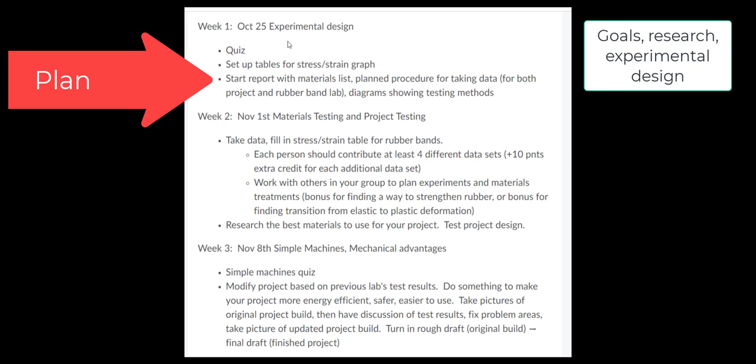Just a quick recap. Hopefully you made it through designing an experiment: how you're going to take data, what inputs you're going to measure, what outputs you're interested in, revisit the goals and working criteria of your project, and think through what pieces of that you are meeting. Once you have that experiment planned out, the next step is to actually take data, measure something, whether it's strength, energy efficiency, or ease of use. You could talk to neighbors or friends, ask them to try it out and give you suggestions.

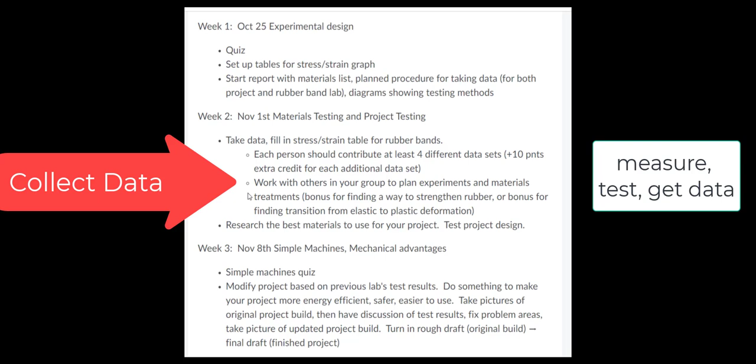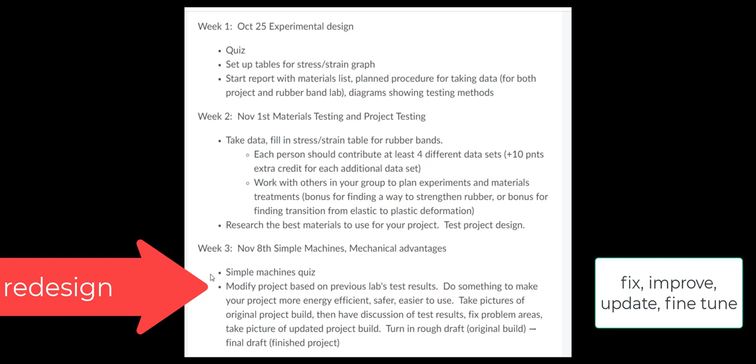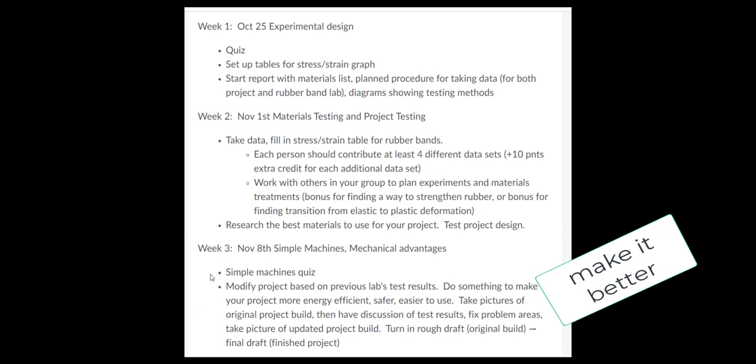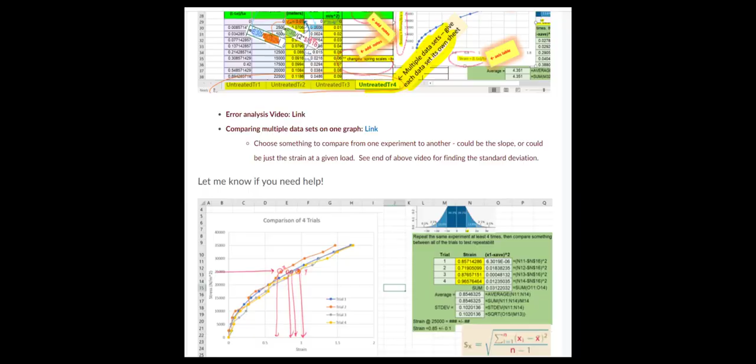After you test it and get that data, the final step is to redesign. Take into consideration the tests and data you collected and make what you built just a little bit better. Nothing out there is perfect. There's no perfect car, no perfect house. Everything can always be redesigned to be just a little bit better, and that is the point of testing. That's how progress is made, fixing and updating things every year to make it a little bit better.

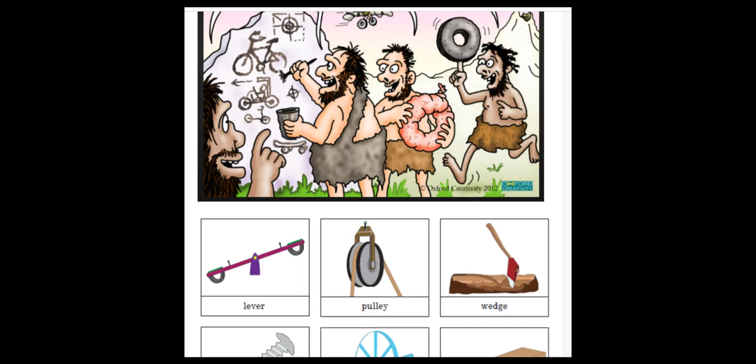As part of this, I wanted to introduce everybody to some simple machine concepts used throughout mechanics classes and mechanical engineering. There are different ways of taking large forces and turning them into small, manageable forces—things like levers, pulleys, wedges, screws, wheel and axle, and inclined planes. So what was very difficult to lift and move around becomes very easy using some of these little tools.

There is a quiz that goes through some of these concepts. I made this quiz bonus because I want everybody to really concentrate on modifying their project this week. So your number one priority: work with your team, update and modify your project, do some research, see how you can make what you built just a little bit better, document that—take a picture of the original build and then a new picture of what you updated. This quiz goes through principles of how to use gears, pulleys, and levers to take large forces and turn them into small forces.

I'm going to go through a few notes, and there are some PowerPoints attached in the content for this, but it is bonus. Some of these concepts—if you have not made it through Physics 1 yet, or seen any mechanics classes, and this is just really frustrating to get through—you do not have to get through it. It's just a bonus, but hopefully it will introduce ideas on some of the magic of mechanical engineering, of being able to move mountains very easily. It's these games you play with forces and force ratios that allows us to do that.

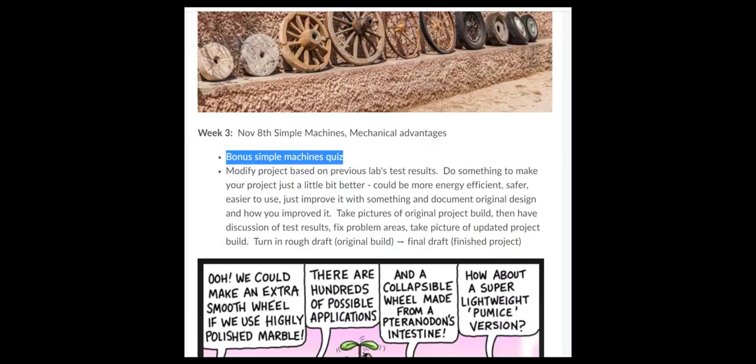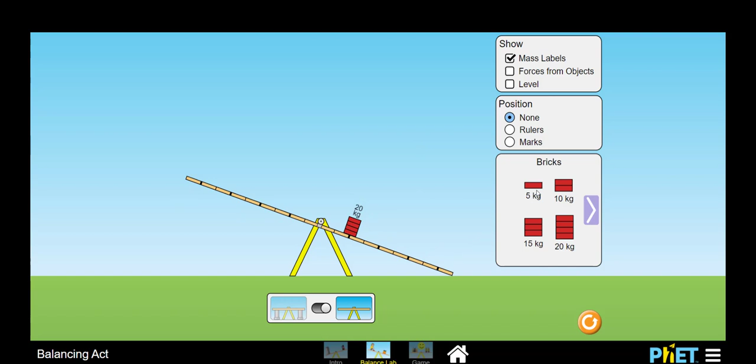I'd like to start the discussion of simple machines with a lever arm. This is a PhET simulation from Colorado University, Boulder, back where I'm at. Let's say you have this huge weight, and maybe you're just not strong enough to lift this thing on your own—maybe this is the maximum of what you can move around. So you want to be able to move this huge weight with a teeny tiny little force. That's where lever arms come into play, and there's a couple of different ways you can set this up.

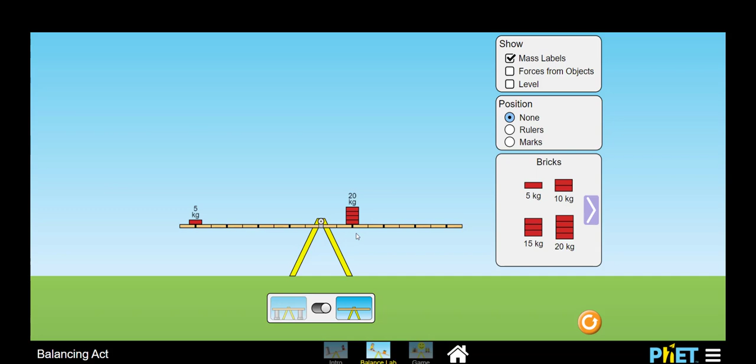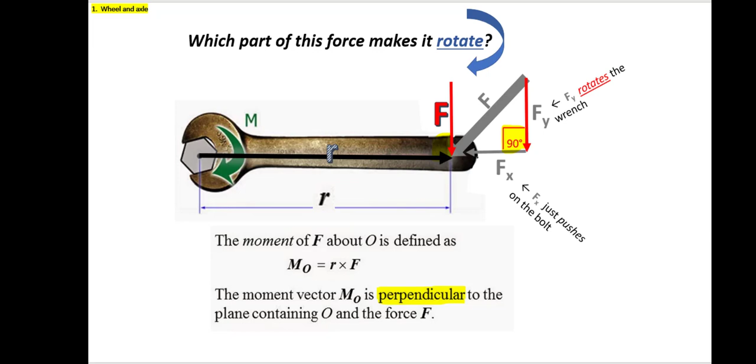The idea is to twist something, to turn something—it takes two things: a distance as well as a force. For rotational motion, it's not just a force; you have to have a lever arm, and that force needs to be 90 degrees perpendicular to the lever arm. So if you consider a wrench, if I'm just pushing in the same direction, Fx is not rotating it—Fy is the piece that's rotating it. You can move quite a lot around using lever arms.

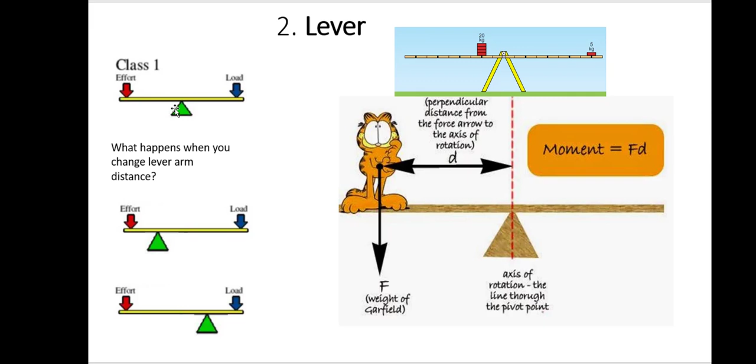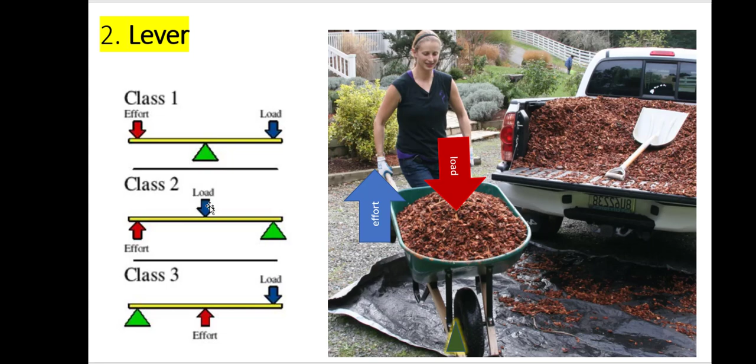There's a couple different ways to set these up. Class 1 is what I just showed you in the PhET simulation: you have the effort, that's what you put into it, versus the load, the big rock or whatever you're trying to move. You can put that rotation axis in the middle of this thing and play around with those distances. The other way is to actually have the rotation at the corner and put the effort on—this would be like a wheelbarrow. If this was the wheel on your wheelbarrow and the handles, and you're pushing it up with a big pile of rocks in the middle, that's what a class 2 lever would look like. Class 3 is actually like your arm.

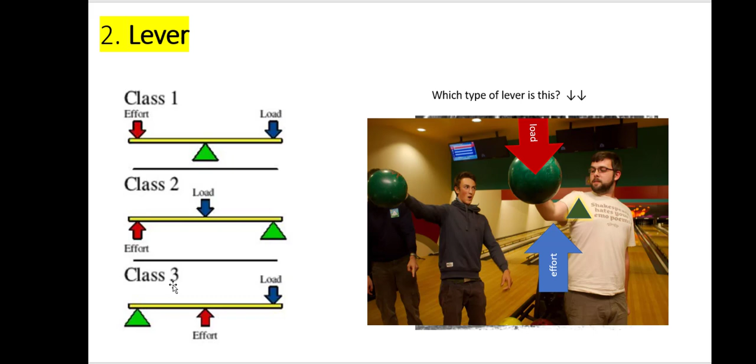So this could be your shoulder. The effort is your muscle, and the load, that could be a bowling ball or some textbook in your hand that your muscles are then moving around, pivoting around your shoulder. So these are the class 1, 2, 3 levers, and this is in the quiz to identify some examples of these different levers.

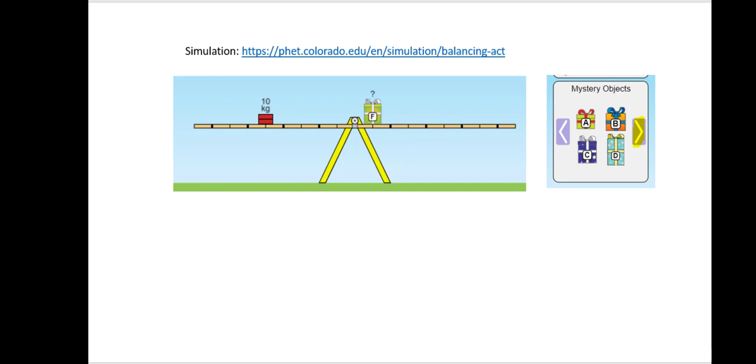Okay, back to our example. It's amazing that you can move these great big forces around with just a small force, but it comes with a caveat, and that is the amount of displacement.

How far you move something is going to be a function of how far away from that axis of rotation you are. So if you consider a circle, one centered with its edge on the very large load, and one centered with its edge on the very small load, consider the arc length that each of these moves.

If I move the large load maybe 30 degrees or so, how much distance has it gone up and down versus how much distance has the little 5 kilograms gone up and down? The trade-off is that this end of the lever arm has to move quite a lot. So you get a very large movement with a small force to produce a very small movement out of the large force. But you can still move that large force around.

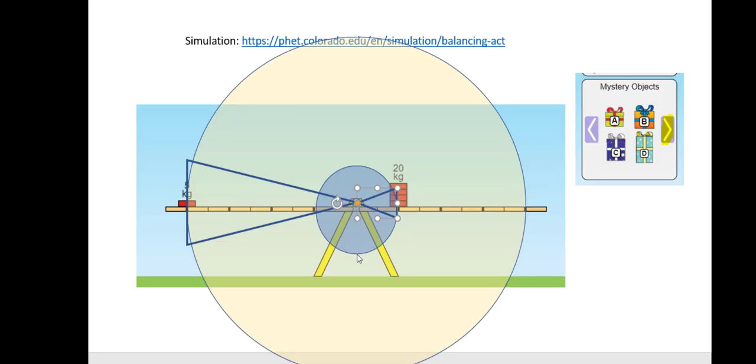That's pretty cool. Okay, some other ways to see this. Let's say I have not a lever arm, but a gear, a small gear hooked next to a large gear. If I have a large lever arm and a small force, that will give me the same torque as a small lever arm and a large force.

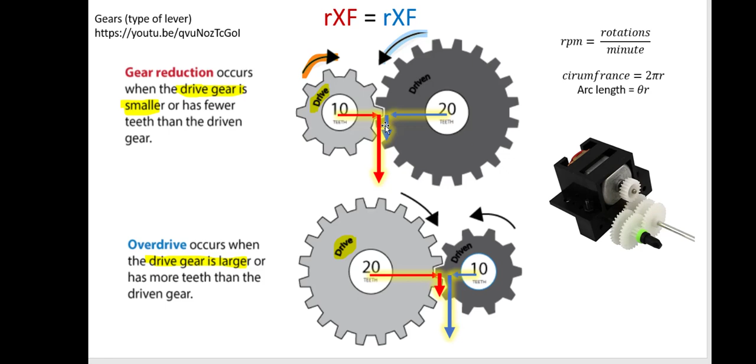This is like a transmission in your car, gearboxes in toys. If you have any kind of motor in your project and want to look at RPMs, or you're having a hard time with forces and want a large force out of a small force, you can do the same thing with a gear, and it's exactly the same as that simulation.

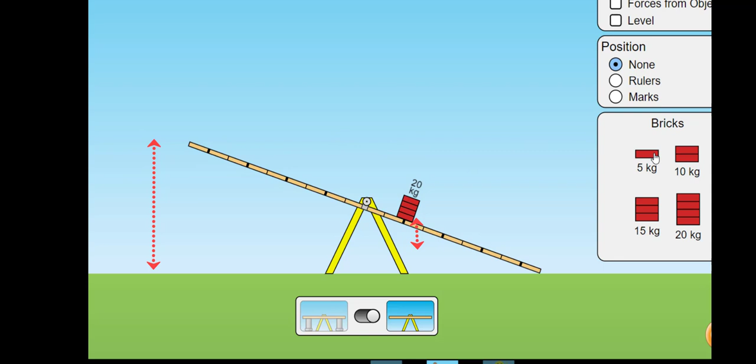So a small radius with a large force will balance a large radius with a small force. There is also a similar relationship between how those two sides are moving around. The side with a small force and large radius, let me pull this up again and think through the number of teeth.

Let's say this little gear only has 10 teeth and this one has 20. If this one turns a full revolution, 10 teeth, click, click, click, click, click, it's gone 10 teeth, how far has the 20 tooth gear turned? 10 teeth would be half of the circumference, so as the little gear rotates an entire revolution, the large gear has only gone around half of that.

Same kind of deal. So to match those forces versus to match the RPMs, the small gear will be rotating quite a bit faster than the larger gear. A good example for gears is to think about how your bike works.

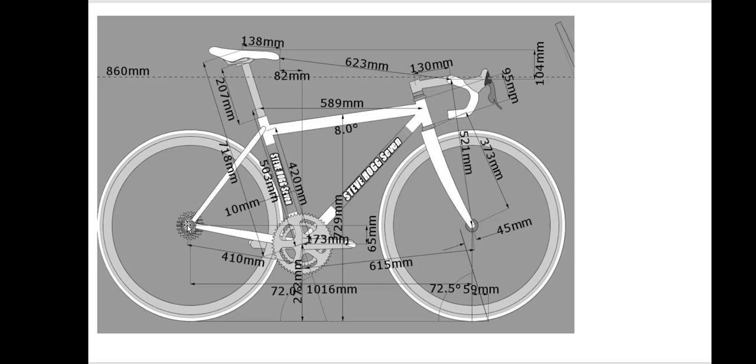You have bike pedals, how fast your feet are going, and the force from your feet. You also have gears in the back connected to your back tire that control how fast your tire is rotating. Let's think through a couple of gear ratios. Let's say your foot is out here at a large radius and the chain is on a sprocket at a small radius. What does that mean about the force from your foot and the force in the gear?

Your foot force with a large radius is going to translate to an even larger force on this small radius. Let's pull up that simulation again. Let's say your foot is out here at a long radius, only 5 kilograms, and you're going to have a small radius on that sprocket that now has a really big force.

That's pretty cool — your little foot on the pedal produces quite a large amount of force. But you have to think through how that translates to how fast your back tire is rotating. Remember, the small gear rotates faster than the big gear. So if the small gear had 10 teeth and the big gear had 20, the small gear going around once means the back gear has only gone around half a turn. That's why when you gear down on your bike, it's a smaller force, easier to pedal, but you have to pedal faster to go the same distance.

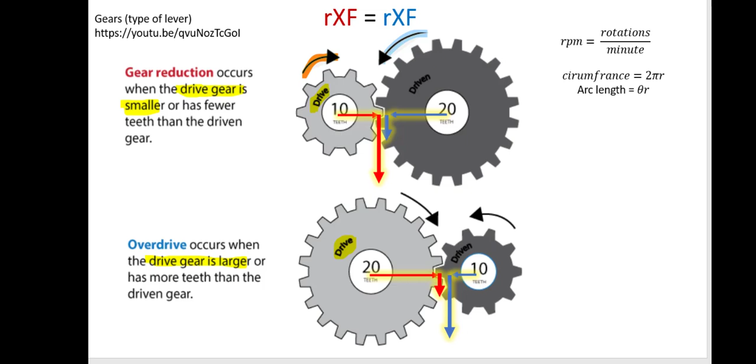So next time, maybe I'll give you bonus points if you go on a bike ride and really think through those gear ratios and how those gears are working, because that's a great application. That is one of the simple machines, gears. It goes through transmissions, gearboxes, and motors. It's hard to find a mechanical tool that doesn't have a gear in it somewhere.

Okay, so there are levers, and that actually kind of gets into a bit of wheel and axle. There is also a screw. That is one of the simple machines. Let me scroll down here.

A good application for a screw would be a vice grip. Okay, so here's your screw, and you can imagine putting a piece of wood in here. It's a very large gripping force for a very small force to turn this screw.

So this is a ramp. You can think of those threads wrapped around there like a ramp, which is another simple machine. It's the difference between driving your car straight up the side of a building versus using the ramp in the parking garage at the airport.

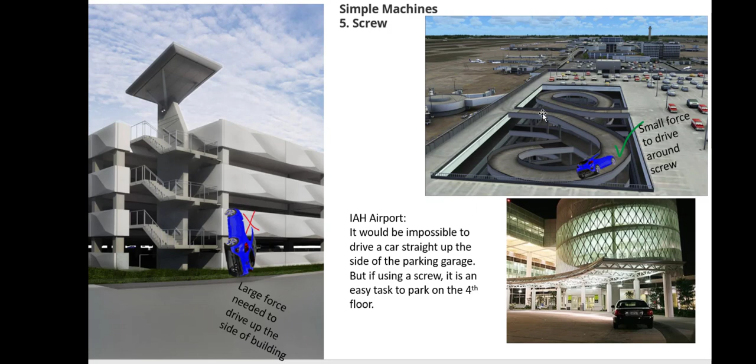This is a fun thing to go around if you've been to the airport downtown. Okay, so that little ramp is wrapped around. As you rotate this 360 degrees, usually for a single threaded screw, you travel the distance of the pitch between those threads. So once around, you've moved this only a millimeter.

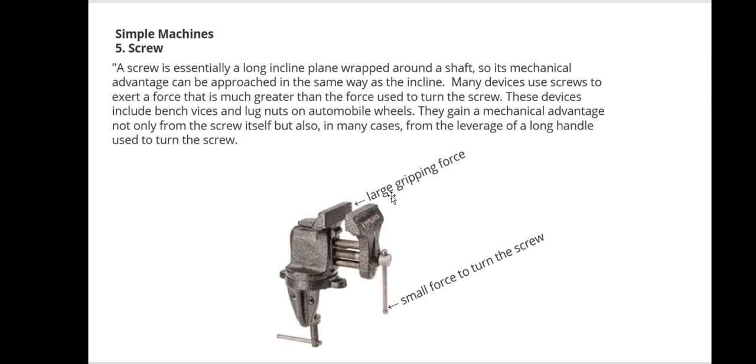So a large distance to a small distance, but it goes from a small force to a large force, a very large force. So the screw is another one of those simple machines, and you can see some example calculations here.

This is from a statics class. You can model that ramp that twists up the side of the screw with a block and a wedge, drawing free body diagrams. So for all of these mechanical systems and most engineering applications, it all comes down to understanding forces.

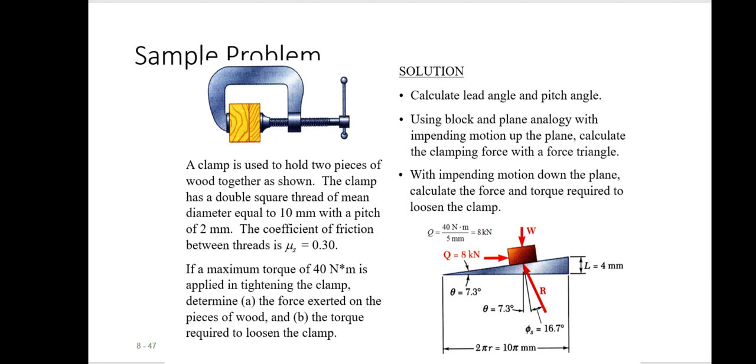If you take physics or mechanics classes, you will analyze systems by drawing a piece of it, drawing arrows that represent maybe the weight of the object or the ground pushing up on the object. You can think about the friction acting on that. Then you add these arrows together, which are called vectors. They have a length and also a direction. That is how you work around these things.

So for statics, all of those vectors will form a closed loop. Everything in the vertical direction cancels out, everything in the horizontal direction cancels out, and you can see what forces would just barely balance one another.

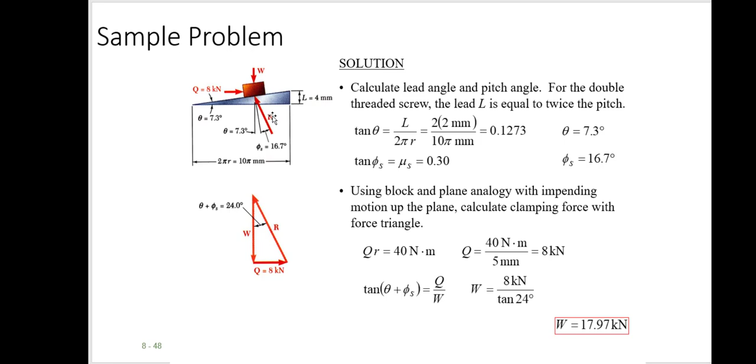For dynamic systems that are moving, the vectors are not equal and opposite. They don't cancel out. And whatever is lopsided and doesn't cancel out, F equals ma - that's which way the thing is accelerating, and that can be angular acceleration or linear acceleration.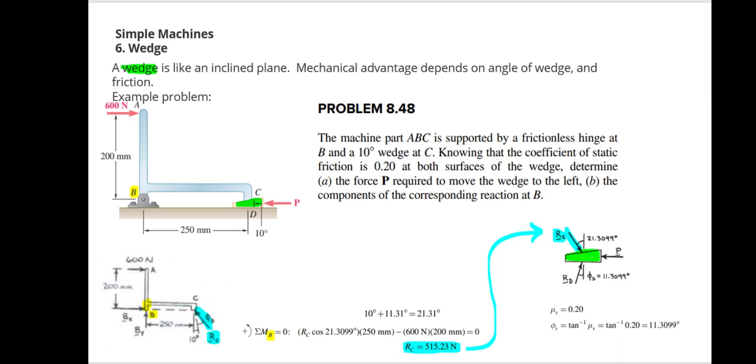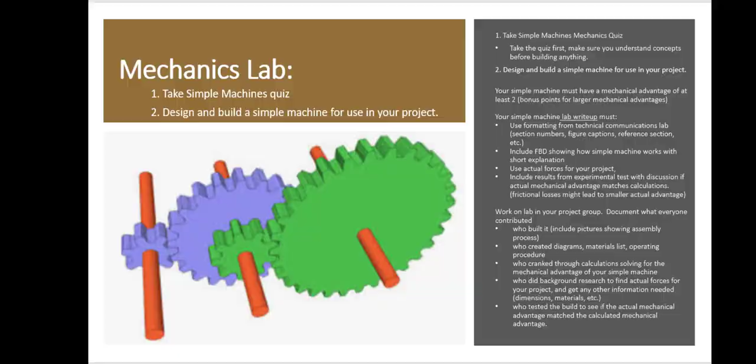So I've copied in the PowerPoint here a couple of example mechanics problems that you can study and try out in that Simple Machines quiz. If you're around on campus, I can go through some of these, or I can talk with you through WebEx if you're interested in thinking through things more.

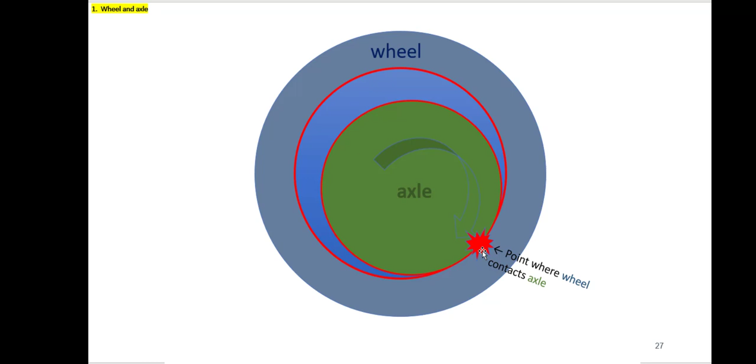So it has a wheel and axle, and really thinking through how those guys are interacting and what force. So here's the weight being held up, and that is held up in part by friction and in part by a normal force. That one's kind of a tricky one to analyze.

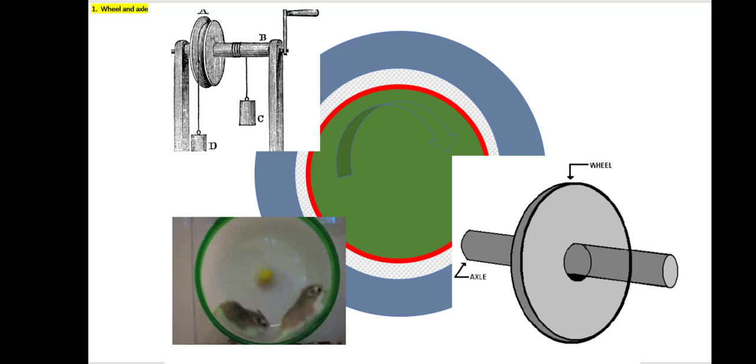There are pulleys. Let me scroll down here to the pulley problems. Those are another really fun thing. Maybe you have one set up in your garage. So for these, you count the strings.

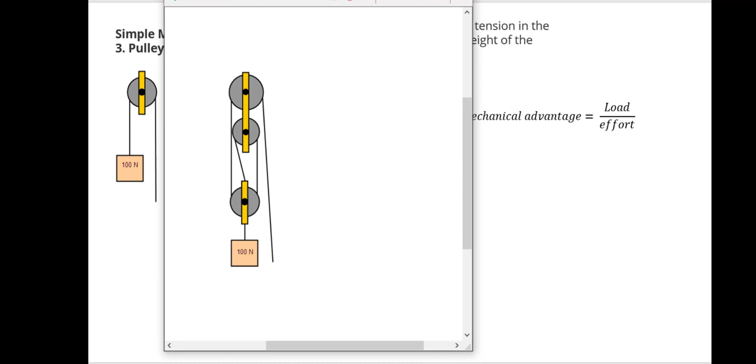Let me just grab an example. The effort is going to be how much you have to pull on one side of it, and the weight is what you lift. So the mechanical advantage is a ratio of how much you have to tug on it versus how much you're lifting up.

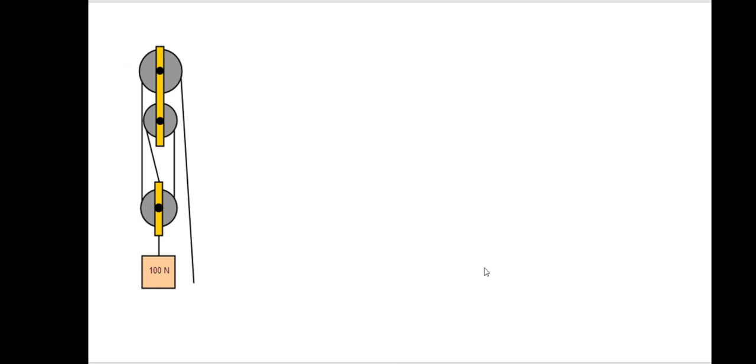So for this case, I'm going to carve out just this piece of it. So when you make free body diagrams, and this is for any complicated system, you take that complicated system and you just carve it up.

So you look at one small piece at a time and start with what you know the most about, and then work your way over to what you know the least about.

So here's an example pulley. Let's say I've got 100 newtons. Newtons is force, a kilogram times 9.81 meters per second squared on Earth. So it's mass times gravity.

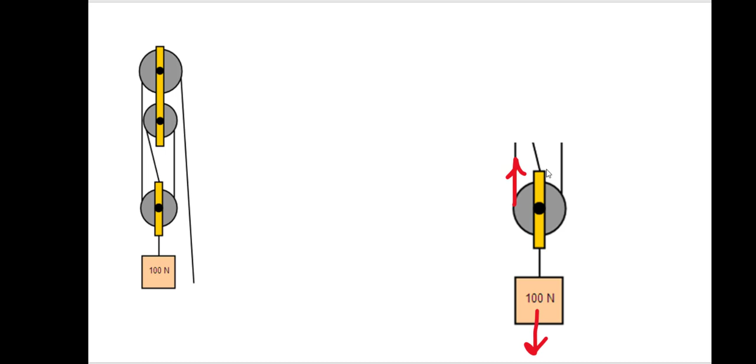And you can see if I carve this section out of it, that this 100 Newton force is held up by 3 different cables. So if I look at the forces in the y direction for this system, what I will have is 3 tensions holding up the weight, 100 newtons. And if it's static, not moving, no acceleration going on, then that adds to 0.

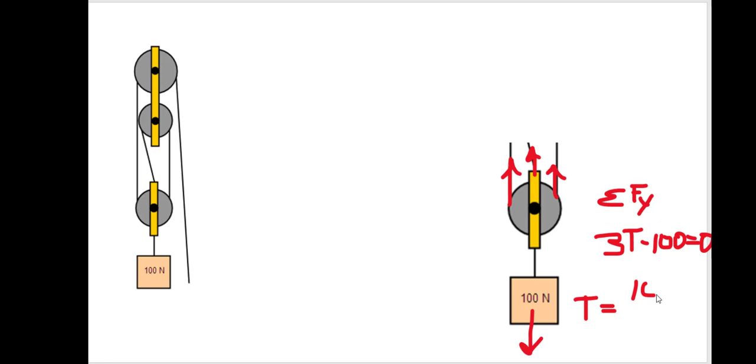What we have then is that tension is equal to 100 divided by 3, or 33.33333. So if you take this tension and trace it getting wrapped around and wrapped around again, and then over here, this is the side where somebody is pulling this weight.

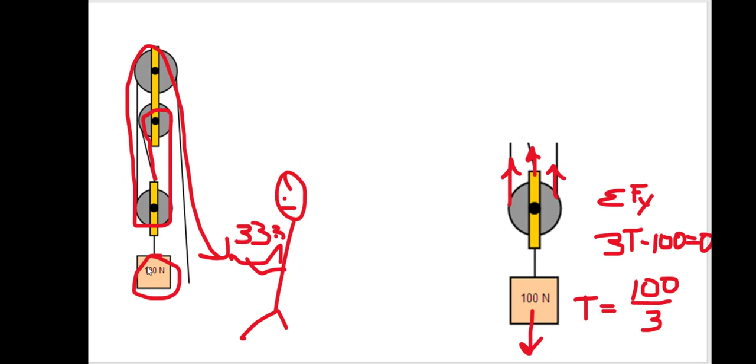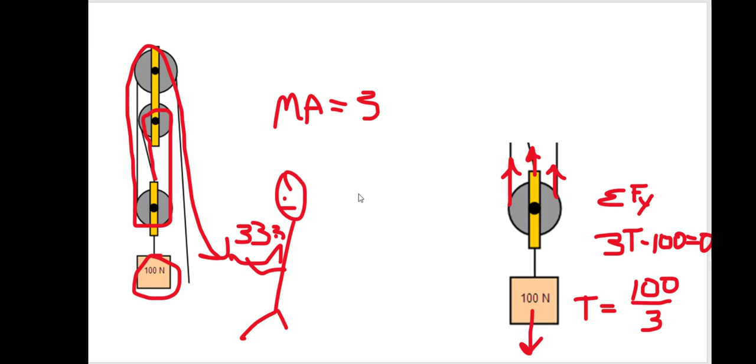That's your 100 divided by 3. So there's your mechanical advantage. I can lift 100 newtons, this huge weight, with only 33 newtons. So you would say your mechanical advantage is 100 divided by 3 equals, you're getting an advantage of 3 here. And depending on how many times you wrap that cable around, you get larger and larger mechanical advantages.

With the caveat that the effort side is going to have a very large displacement compared to the load side, which will have teeny tiny little displacements. So you can move it with a small force, but you're going to have to really pull in that rope. It's like a bike tire, so you pedal your feet fast and you don't go very far, but at least it's a small force.

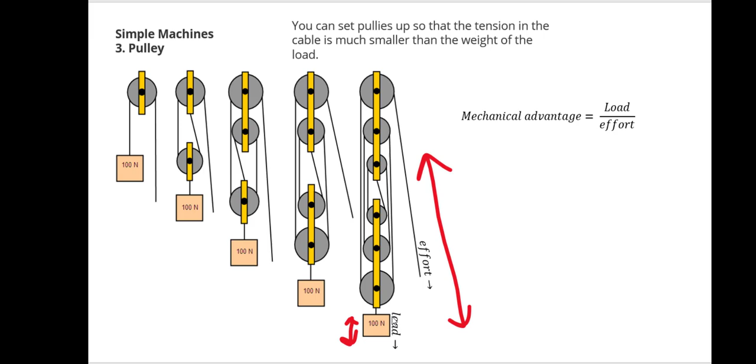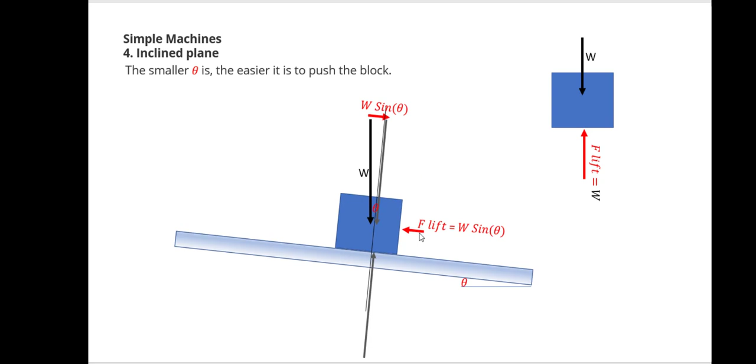So whatever you gain for mechanical advantage, you usually lose with displacement, and that's like a ramp. If you have a smaller angle for your ramp, yeah, it's easier to lift, but it's going to be a much longer ramp to get you to where you're going. That's the trade-off for mechanical engineering.

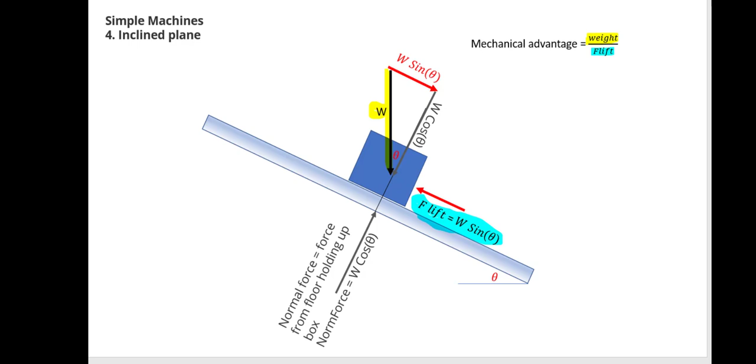And this is kind of the point of mechanical engineering, is to make life easy on yourself, to be able to move large objects around very easily. You can do that a number of different ways: there are lever arms, pulleys. A wedge is very similar to an inclined plane and screw. Those are kind of all related to one another.

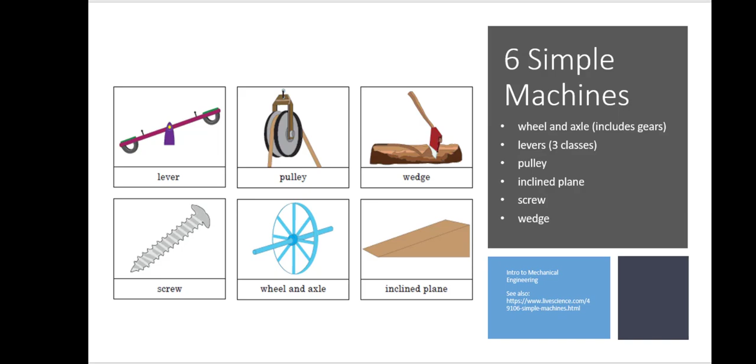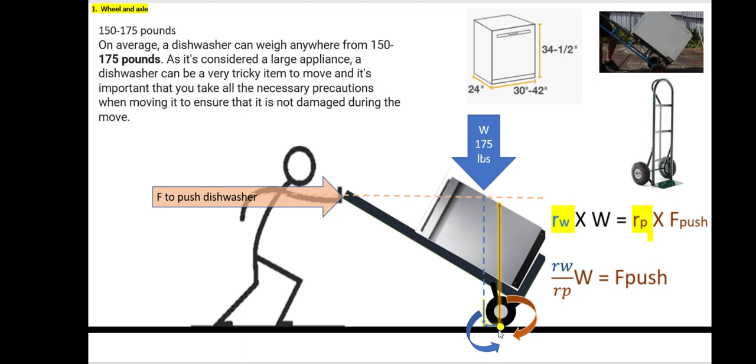Small force at a long distance equals large force at a small distance. So how you tip this around and what it's pivoting around, it all kind of comes back to that neat little PhET simulation. So play around with the PhET simulation.